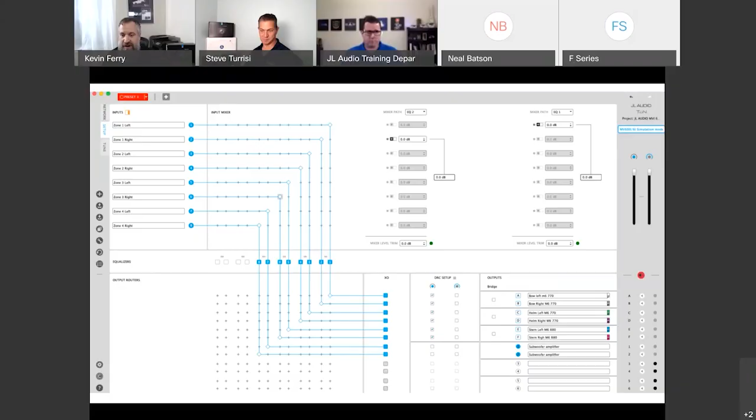Now, if you don't have these files, they are available on the JL Audio Help Center for free, so feel free to go in and download them. And since we're playing a sine wave, we do want to make sure that our outputs are muted. You can disconnect them, or you can even set this up before you connect the speakers. But since we are playing a sine wave, you don't want to be running a sine wave through all of your speakers for any type of duration.

So we want to mute those, and we can do that right there in the Tune software. Then once we have... Real quick, Kevin.

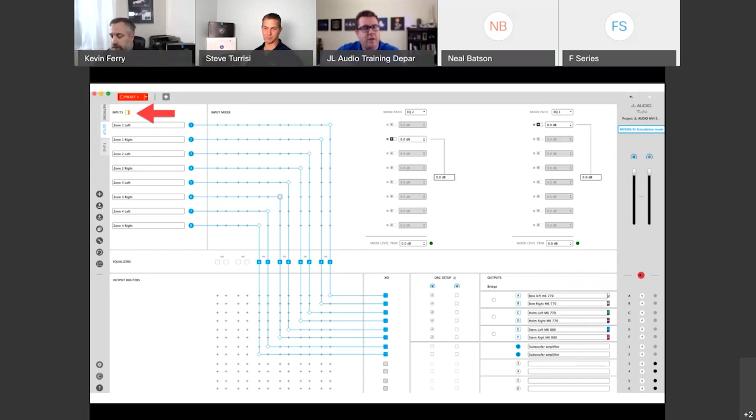When downloading files from our help center, make sure you don't compress them. So if you're an iPhone user, don't put them in whatever it's using now, Music or whatever, it compresses the file. You want to maintain that wave format that the download from our help center uses. Any compression is going to remove some key information on the top end that could affect the levels, especially on pink noise when we get into the tuning process.

And secondly, that mute icon Kevin was just talking about, man, on MVI, I love that. On boats, it's tough to get into some of these compartments and disconnect and reconnect speakers. So from an install point of view, being able to sit in the captain's chair and just mute the speakers so you can set your levels and then unmute them, that is so much nicer than going to every single output individually. Yeah, I definitely use the mute button more often than not. But if you're extra careful, you can go in and disconnect the speakers too, or set this up prior to connecting them. Just depends on your preference.

Thanks, Rob. So up in the upper left-hand corner next to inputs, you can see the icon is highlighted there in orange. So we're going to go ahead and select that. We'll play our 1K sine wave at about 3/4 volume on the receiver, making the assumption that the receiver will not be clipping at that setting. Keep in mind that is an assumption.

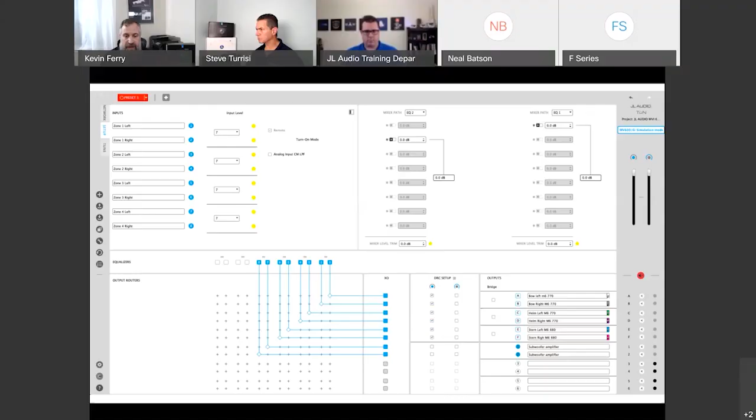Now we want to go through and change the input sensitivity level to the highest numerical value that stays yellow and does not go red. Red is very bad, that is clipping, and you do not want to clip the input of the DSP or of a digital amplifier in general. Make sure that you do not have those as red. That is extremely, extremely important. If you take one thing from the training today, it's getting that input sensitivity set up properly. Now green, you might see a green light, and that means you have a little bit more room to work with, so you can go up. And it is as easy as that. So you get that indicator to be full yellow without going red, and you are set up on your input sensitivity.

Now if they are constantly red no matter what the value is, then you may want to look deeper into the output source you're using. If they're gray, that means there's no output or no input coming into the amplifier. So you can use those lights for some troubleshooting also. Now, like I said, you want to make sure they're set up properly. If they're not, it's going to make your tuning process exponentially more difficult, if not impossible. So getting a good setting here is extremely important. Keep in mind, you will have to set the input sensitivity for each set of inputs coming in. In this case, we would have to set each one of those, all four, up correctly to get that constant yellow input. If you only have 2 inputs, then you only have to set it for those 2 specific inputs.

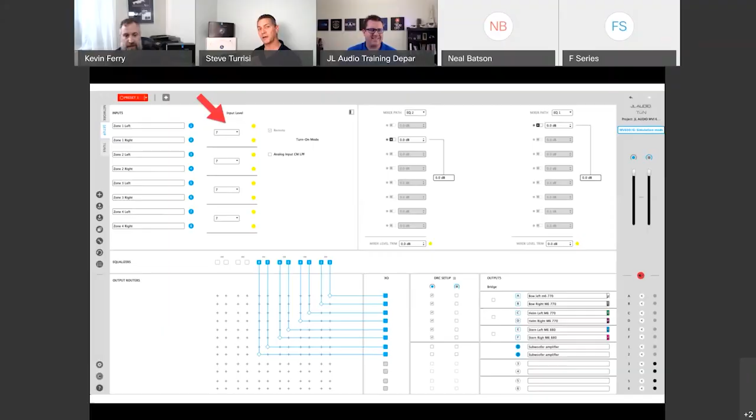Hey, Kevin. Yeah. If you're dealing with a source unit that you know really well, something like, oh I don't know, maybe a Media Master, if you already know what number works on that, nothing really changes, right? You could just put that number directly in.

Like, for example, if you set zone 1 and it shows up to, say, 6, could you just put 6 on all the other ones? You can, as long as all the zone volumes are set up equally, you're good to go. You could absolutely do that, but you'll want to go through the settings and make sure your levels are all set up the same on the Media Master or whatever receiver you're using, if it has multi-zone volume control. If it doesn't, then yes, you could go through and most likely be fine, but I would always double check, just because I'm that kind of guy.

Alright, so after our input sensitivity is set, we need to start looking at the tuning process, and we want to tune to a preset curve.

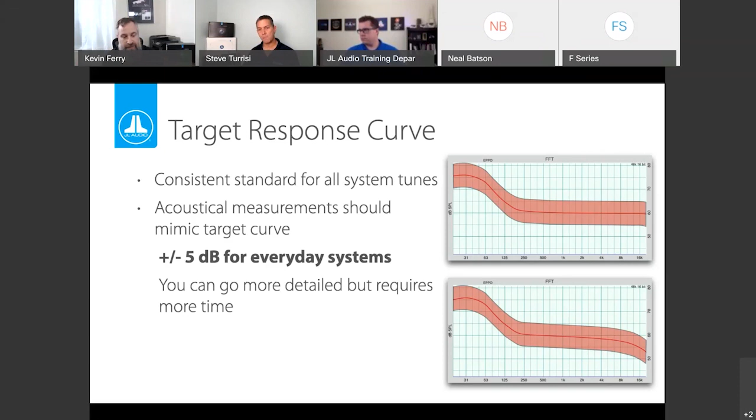So when we talk about that plus or minus 5 dB, we just want to keep it kind of where that red shaded area is. We go up from the red line 5 dB and down from the red line 5 dB. So this is actually a great example of a measured frequency response lining up with the target response curve, this is actually just about plus or minus 3 dB. Now we would just want to go through and make the other speakers match in the system.

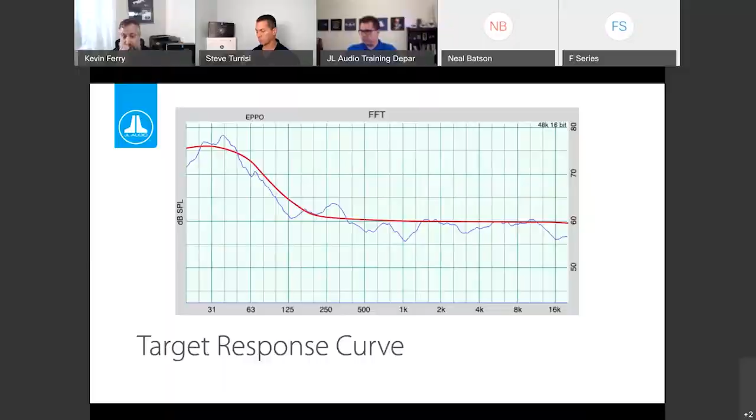So it's more important to get the speakers to match one another than it is to match that specific curve. Now that we figured out where we need to end, let's look at where we need to start.

Starting with the farthest speaker from the microphone will help with the levels. As you get closer, you will find yourself cutting the levels of the speakers that are closer to the mic. So you start with the farthest speaker from the mic and work your way in. If you start with the close speaker and move away, you may end up having to boost the speakers that are far away. Distance makes a difference with the measured SPL, so by starting with the farthest, it's going to help us down the line, especially with setting our levels.

By breaking each section down and tuning to a zone, it really simplifies the process. You'll also notice as we get into the presets, these zones coincide with some really good suggested presets. So we're going to go through and break these down by the bow speakers, by the helm, stern, and any other zones the vessel may have.

As we're tuning these zones, one nice thing is you're breaking it down to maybe 4, 6, or even just 2 speakers at a time. But when you look at larger vessels that may have 10 speakers in the bow and 10 in the helm and stern area, tuning all of those at one time is going to be overwhelming to someone just getting into it—maybe even overwhelming to some of us who tune on a regular basis. So breaking it up into these zones really helps simplify the process.

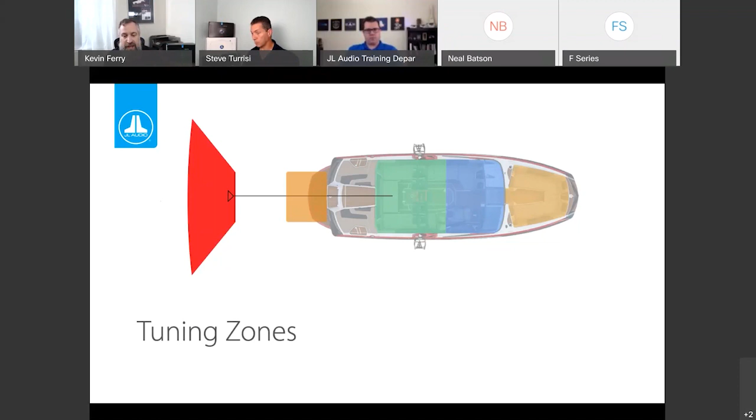The only thing that may change is how much one zone may impact another. Depending on the layout, the bow of a center console may impact the cockpit area differently than it would on this specific towboat. So you may have different interactions that require minor adjustments, but the principles are the same.

So if we start in the bow of this vessel, we have to choose where to place the microphone for measurements, knowing that for all time-related measurements we need a single point of reference. So who do we optimize for? Remember, as good as it gets for one person, you can expect a little degradation for the others.

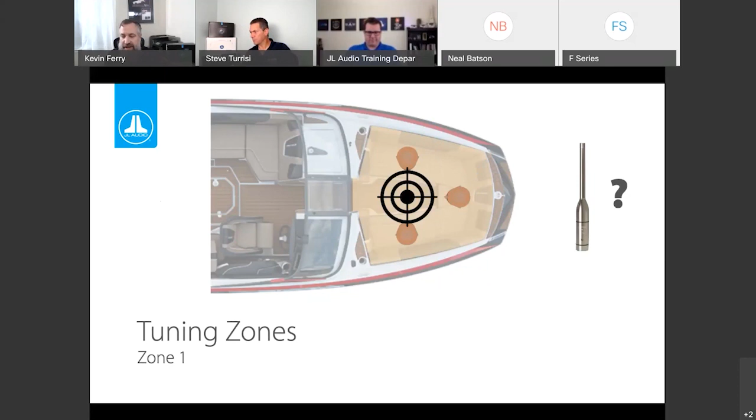We'd recommend picking a central point between the listeners so the entire zone can sound great—no one seat better than another, with the whole zone having great sound. This may mean you're not taking full advantage of all the phase and signal delay related functions of the MVI, but we can use those features when we get into other aspects of the process.

Moving to the main section of the boat, there are really two sections: the helm and the stern or aft section. The helm should probably be treated as an independent zone, but we're still faced with one question—where do we put the microphone?

In this case, we know there's going to be someone important sitting or standing here, so we might be tempted to drop the mic there and tune specifically for that zone or that listener. You can do that—it makes a great preset if the customer just wants a single person listening environment. So you can make that a preset.

Should you tune the entire system for that specific person? Probably not, but if you want to make a preset, you can go ahead and do that. Because what happens is, if you tune to that preset, what happens to the other guys on the far side of the boat?

They are kind of screwed, right? So instead of screwing over the people you're probably trying to impress - the person on the left may have bought you the beer, the person on the right may have bought you gas for that day - you want to impress those guys too. So you might want to pick a more central location so everybody has a good experience in the vessel. It's not so much about one person, it's about the party and everybody having that great sound.

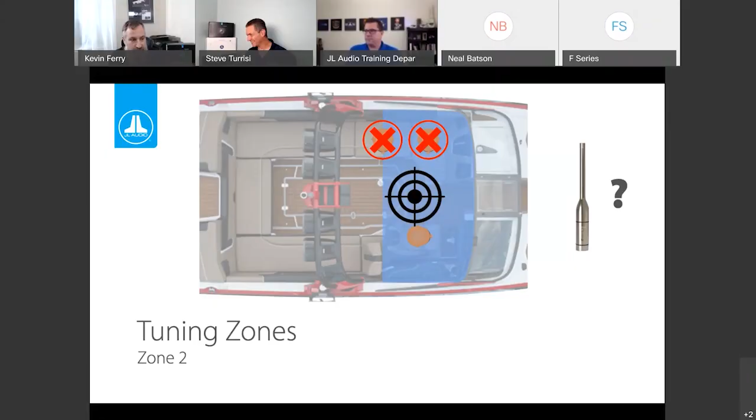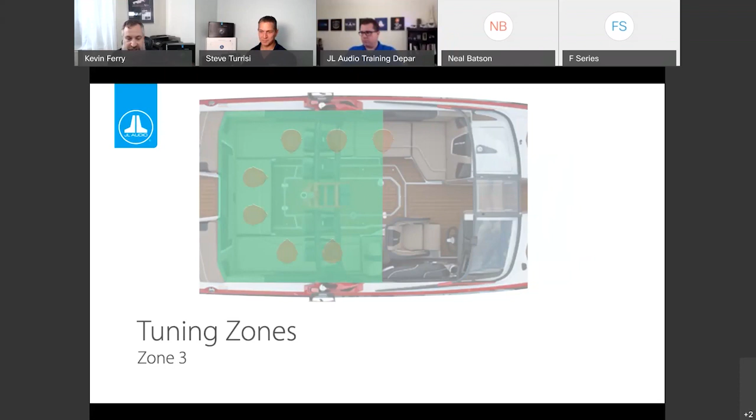So we'll go ahead and take our measurement there in the center. Now if we look at the stern or aft section, we can treat that as another zone. It may not always have a separate control on the source unit, but it can be identified as a different listening location for tuning purposes. And this one has a large number of locations where people may sit, so where do we focus? Again, finding a central location...

Is highly - you know what, I always think, man, I wish I had this many friends.

So a central location is highly recommended. And it's funny, as you get older, you end up more in this location than in the bow of the vessel. I remember as kids we'd always sit up in the bow of my parents' boat, and now as we get older we kind of migrate back into this location here. So again, we picked this central location, and it really is highly recommended.

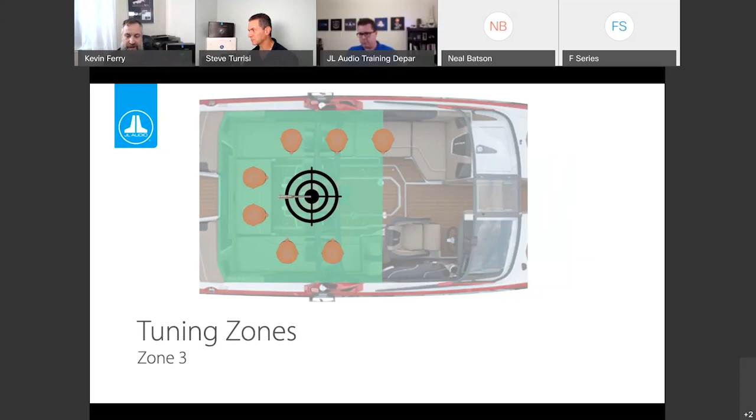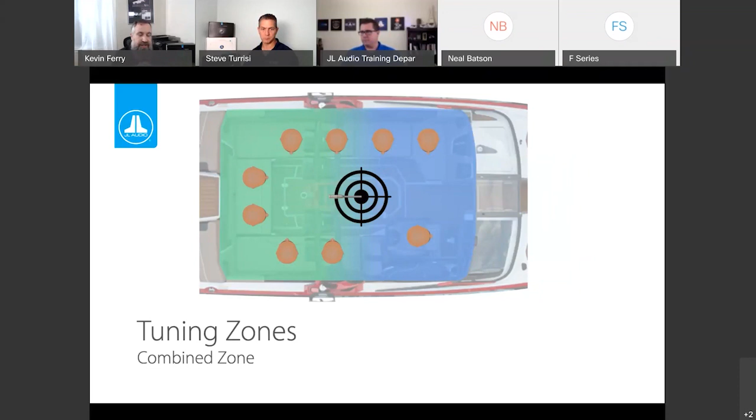Now another approach may be to treat the helm and the stern zones as one, and in this case a central location makes the most sense as well. So now everybody is going to have a good listening experience in those two zones. Remember, when you are tuning for those two zones, they do directly correlate with one another - the helm zone is going to have an effect on the stern. So you want to make sure you take that into account.

So another area directly behind the boat is another key audio zone. In this case, there's a swim platform where you can put a good number of people. Dropping the mic right in the middle of the zone is your best bet - not in the middle of the water, but in the middle of that zone. So make sure you're maybe doing this on a trailer, or you back the boat up to the dock, which was a good suggestion in the last training, and then put the microphone on the dock there. Having the mic out on an inner tube floating out there probably isn't the best bet for your personal equipment.

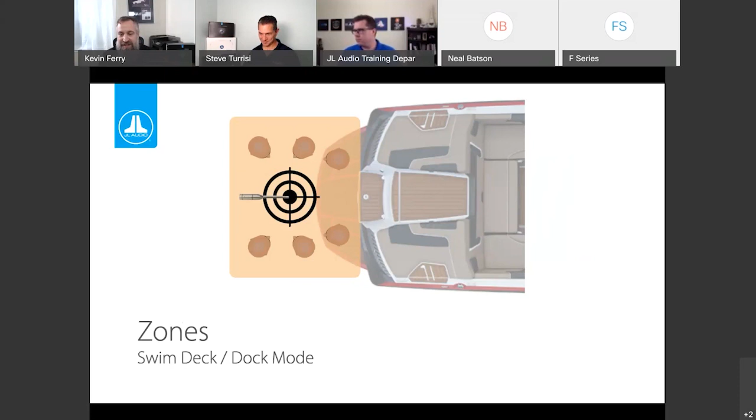So even if the vessel does not have a swim platform, this zone makes sense because the owners may want to entertain while at the dock. That's a great way to go through and do your tuning there. So having the system sound really good in this area right along the outside of the boat can make sense. And again, as we're talking about doing tuning for these, presets are going to really come into play too.

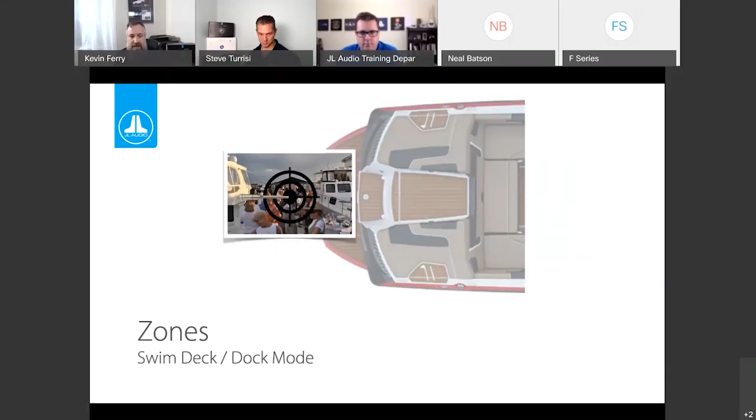Now, for the last zone out on the boat, let's consider the rider. This zone's not only positioned well outside of the boat, but also extends outward towards the left and right sides of the boat. So your person who's wakeboarding - or skiing, but that dates myself - or tubing back there, they're not always going to be in the center location of the wake. So you're going to have a little bit offset to the left and right side. So logically, we should do this at the rider's position - we want to know what our tow length is, and take those measurements behind there where they would be.

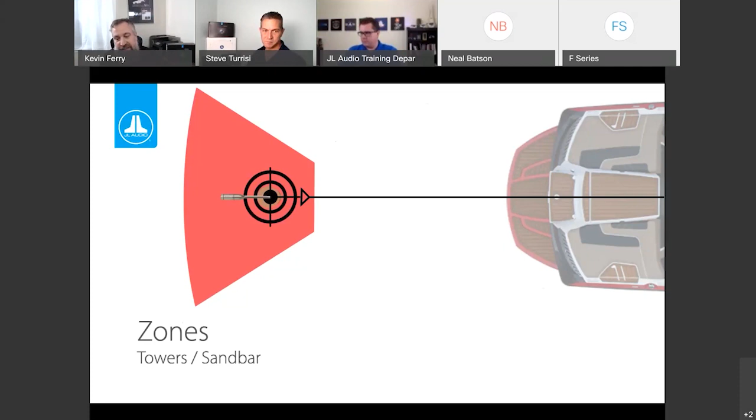Another nice thing about this zone is it can also be used for a sandbar type of application too. Or maybe your boat is parked at a short dock and people are standing right on the shoreline - you can use this for that type of application also. So it really does help, and again when we talk about presets, you'll notice how well they coincide when tuning these specific zones. One quick note: subwoofers are a challenge to get to project well behind the vessel like that.

So when you are tuning for it, just bear in mind, don't go crazy trying to jack up the sub to try to compensate for the distance, because the sub is inside the boat and this is not inside the boat. So it's very difficult to get the same level of bass on shore in that example as you would on the boat. Neal in our WebEx chat says just go full send on the gains for this particular zone. I hope he's partially kidding, because that could be very damaging—you won't even hear the sub screaming for its life if you overdo it. So just be mindful that when you get further away and you're loading differently, you may not get the same level of performance without some significant system design.

All I heard right there was add more subs to the system—add more subs to the system and just turn them down for when you are in your cruising preset, right?

So let's take a look at what we're trying to achieve with our system and our EQing. Here's a left and right measured response of a vehicle specifically. You'll get the same kind of response in a vessel. However, you may notice that your upper end is a little bit higher because you're going to deal with a little bit different reflections and different tuned speakers that you have installed in there too.

So you can see that we overlaid them into a target curve, and you can see that that frequency taper is already pretty darn close to what the target is. That's why we specifically chose that specific target curve. Now, the upper end has a pretty natural roll-off too.

Now, the energy that we are looking at is raw in its un-EQ'd state and is mostly above the target curve. Well, why? We have it above the target curve because we're going to actually use the EQ to cut down as much to our target curve. If we had the target curve laid in higher, then we would be tending to want to boost to that target curve, where cutting to that target curve is a lot better practice.

And something I'll add here, Kevin, is the reason we like to cut is in some applications, the dips in the measured response are related to a timing issue where the left or right is out of sync, so to speak, like a phase or relational issue. And if you try to boost a valley, you might wind up wasting a lot of time and energy trying to compensate for something that you can't fix with an EQ. So using cut, you can have a much better success rate of getting closer to that target curve.

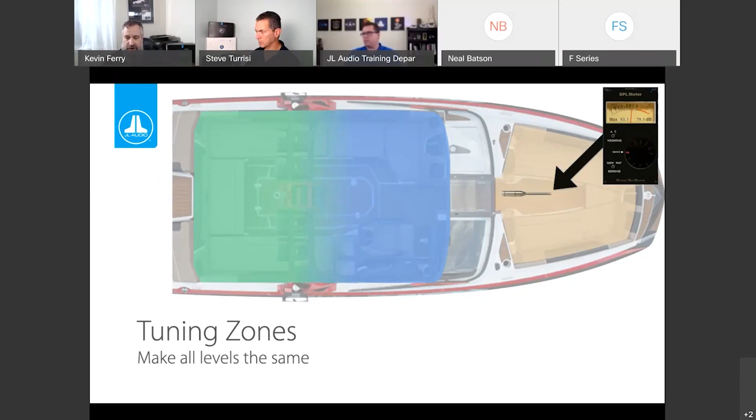Once you get that done, play some music at a moderate level and walk through the boat with your SPL meter. The goal is to get the levels to be about the same as you go from the bow to the helm area and all the way to the stern.

This does not need to be absolutely perfect. It is hard to get a good solid number, especially if we're doing this with music. But I still recommend doing it so that way you can go through and listen to each zone and hear if there's any weird tonality differences between the two or three at this point, and if there's any affecting areas there.

Absolutely do it with music and just casually stroll through as if you were a participant at the party, so to speak. You're just kind of walking through, listening to the music, and the meter's telling you if the level's right. You can rely on your ears as well, but the meter gives you a nice number and a solid reference.

In some cases, if you only have a pair of 6.5s up in the bow and you have like 4 8-80s in the cockpit area and another 4 of them in the stern, you're just not going to be able to get those levels to be exactly the same. So at that point, get the main area, the big loud area, to be as powerful as possible, and don't try to kill that to keep up, accepting that it can only get so loud with a less dynamic system there.

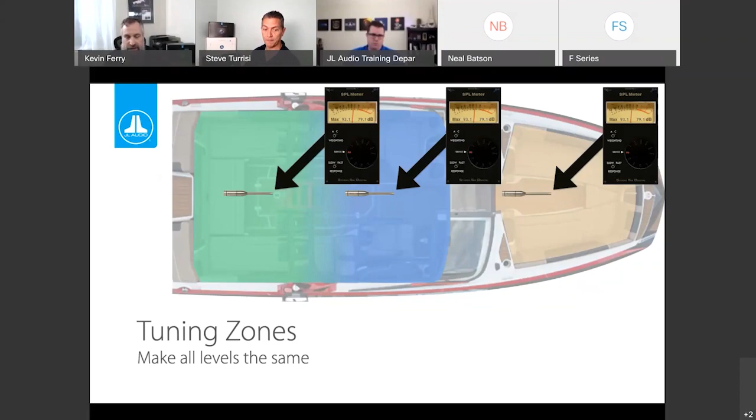Then, like Steve said earlier, after your levels are all set, the nice thing in TüN software is you can link all of the levels together and then raise them up. Just make sure you're paying attention to your output clipping indicators as you are raising those levels, to make sure you get the maximum performance out of the outputs, but without getting into any trouble there.

So we have covered 2 of the 3 pillars. Now it's a good point that on most marine systems, imaging in the true meaning of the term is not a normal goal for boats. Being able to walk through the entire vessel and have an equal listening experience really is the most important. Imaging is about localizing instruments and sounds on a soundstage, which assumes the listener is not moving around and assumes there's a single listener in the boat. Boats very rarely allow for this.

Think about this - even when you're boating, you're probably sitting down, standing up, doing all of that stuff. So you are moving around even as the captain or as you're driving that vessel. So it's very, very hard to get that timing and phase adjusted for that specific area.

Now, you can use some delay, and we can utilize this in some of the presets too when we're dealing with a preset that's affecting one area, especially if the customer wants a single driver listener, listening position. You can go ahead and set that up. However, for the most part, you may delay the subs to get them to match with the mid-bass drivers, and that's going to be the main portion of your delaying - just getting that sub to mid-bass driver transition taken care of.

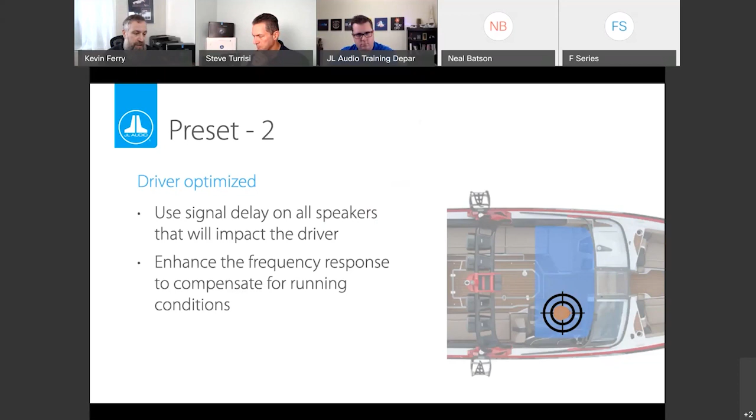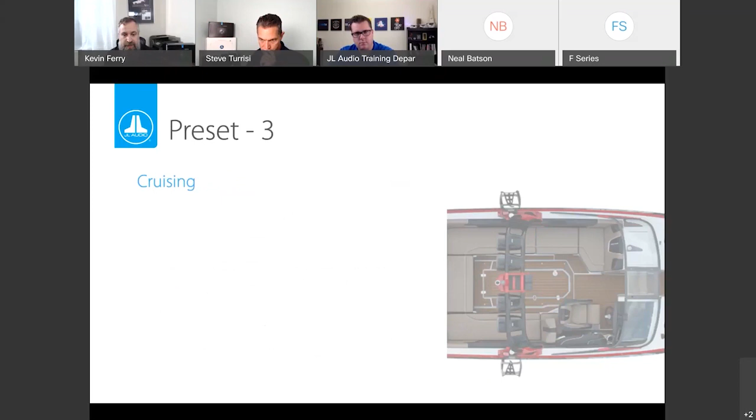So you can really dial it in for this and show off what your skills are when making those. But keep in mind, you have to make sure that your levels are all adjusted for that specific listener also. So it's not just your timing, but we need to make sure our frequency response and our levels are set up for that position.

Now, preset 3 is kind of similar to the driver optimized setting. This is going to be our cruising setting, but it's not a single point where the driver is - this is going to be in the center of everybody. Now, again, we may want to turn off our bow speakers at this point in time. We definitely want to make sure that our tower speakers are not on, but we want to make sure it's nice, it's comfortable, and we want to tune all of the speakers that may influence that area, which may differ between the different vessels that you're working with.

This specific vessel, your bow speakers may or may not really affect that specific area. So if you've already had your tune set up for that area, then you can go ahead and just maybe turn off the bow speakers, turn off the tower speakers, and just have that nice cruising setting. Or you can just have the bow going on if it's not directly affecting it as much.

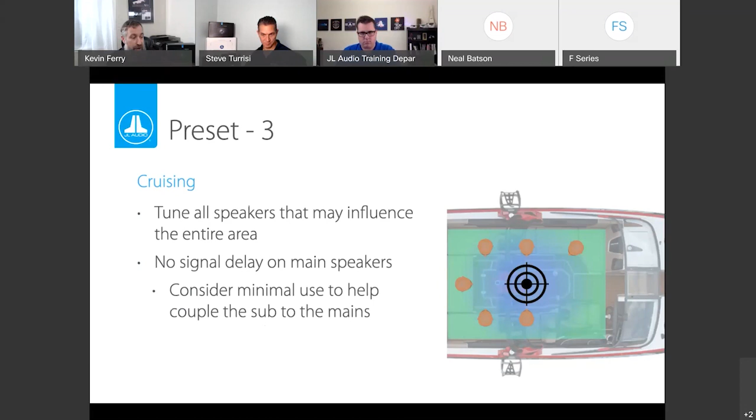This is probably your most popular preset right here. Yeah, this one's going to be your most popular, especially for the adults - this is where everybody's sitting back. If it's not the most perfect day, the windshield gives you a little bit of reprieve from the wind and all of that good stuff. So it is a nice, quieter area to sit in and relax. It really is probably the most used one in there.

Alright, the fourth preset is your rider behind your boat at some distance. Again, tune all of the speakers that will be audible that far from the boat - so probably the main ones you're doing are your towers that you've already gone through and tuned previously. So again, it's just making this a preset. And again, don't try to rail the subs up to make sure that they compensate for back there. You can have more subs, but make sure you're not exceeding the limits of the drivers themselves.

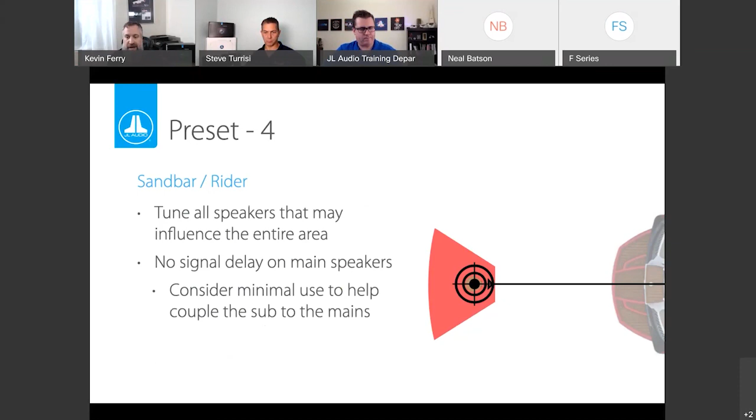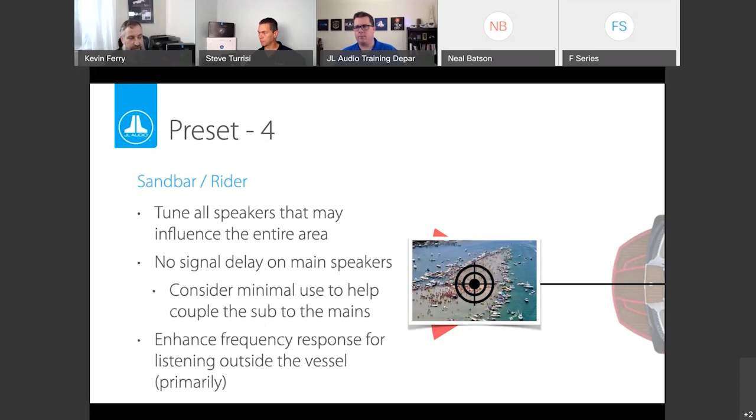So you may want to turn down the subs a lot for the cruising one because you're just out there enjoying it, and if you want to turn them up for this, you can. Just make sure you're not trying to rail them to where you're exceeding the limitations of the speakers. And again, if you're out on the sandbar and out there partying and all of that good stuff, you want to be able to tune for that. You can use minimal signal delay on the speakers to help couple them with the subwoofers, just to get that little bit more output from that sub-mid-bass transition there. But really, you're going to enhance the frequency response for any speakers that are affecting that outside source.

Again, the bow speakers, you may not even have them turned on in this type of preset. They may be completely shut off, since they're really not going to affect listening far back there. So just keep that in mind.

Now, preset 5 is showing off everything that the MVI can do. We're just going to set it up as a more traditional amplifier, using our high-pass filters, low-pass filters, and doing some input sensitivity or level settings to make sure it's acting like a regular M series or regular type of amplifier. That way the customer, or you, know what you're getting when you start switching to some of these presets, and really show off what the MVI can do.

This is really important, especially if you're doing a demo boat for a store, or if you're just trying to show off what your tuning skills are at that point.

So you have that one that doesn't have any DSP on there, and it really will show off what your skills are. That one, I got to be honest, is the hardest one of all, because you have to make sure you scale back the level of the no-DSP setting. It sounds deceptive and weird, but when you tune a system, since you're using cuts an awful lot, you're going to pull out some of the energy of the system. So naturally it's not going to be as loud, even after you adjust the levels, because you pulled some of the energy out. If you don't have the ability to dial it in and balance the energy, parts of it are going to be really freaking loud.

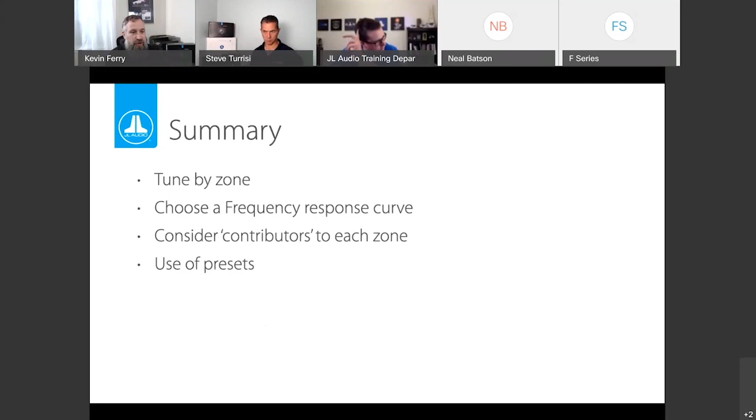Use your presets - they are going to help you out. Doing a quick search on OEM kind of systems, what people don't like or find confusing about the system in their vessel, is maybe they're not using a preset to set up being able to turn off the level control of your tower speakers or anything like that. So use the presets to make it simple for the user to use. If it's not easy and it is difficult, then the experience might not be happy. So using the presets to simplify everything for the user is very, very important.